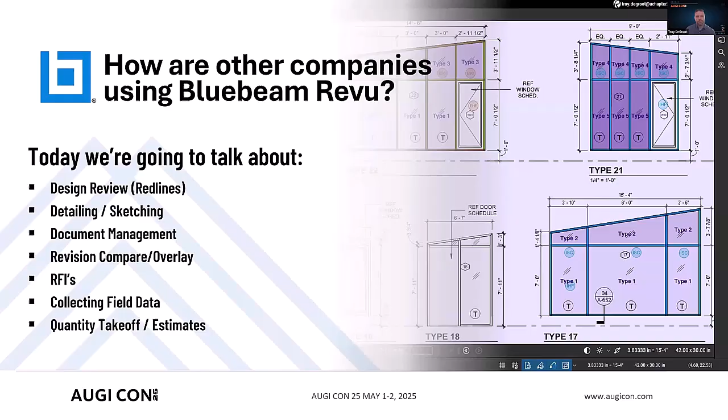So today, we're going to talk about how other companies are using Bluebeam Revu, your competitors. We'll go over just some basic red lines. We'll talk about detailing, sketching, some document management, revision, compare and overlay, RFIs, collecting field data, quantity takeoffs. And while we're talking about all of those, the functionality we're going to share, we've got a bullet list of a bunch of features that I'm going to show you guys as we go through.

So I'm going to jump into the software. I printed my last PowerPoint slide and turned it into a very, very basic digital dashboard. So what I'm going to be doing here is making sure that I check everything off the list. I've got hyperlinks set up to drawings that I want to show you these different things.

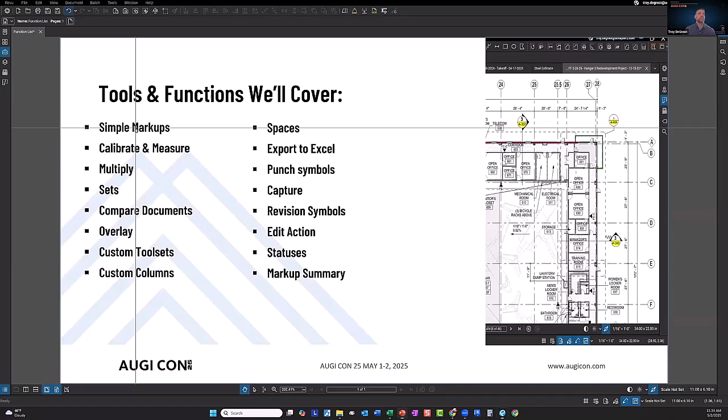So simple markups, calibrate and measure. We're going to jump out and do some of those. So got a drawing open here, just a structural drawing. Just real simple basics. We'll start there in the tools, tool markups. We'll start with the call out.

So call out, you guys know how to use these. It's just you're going to point to something and then you're going to place your note wherever you want it to be and type in what you want that to say. I get pretty creative with mine.

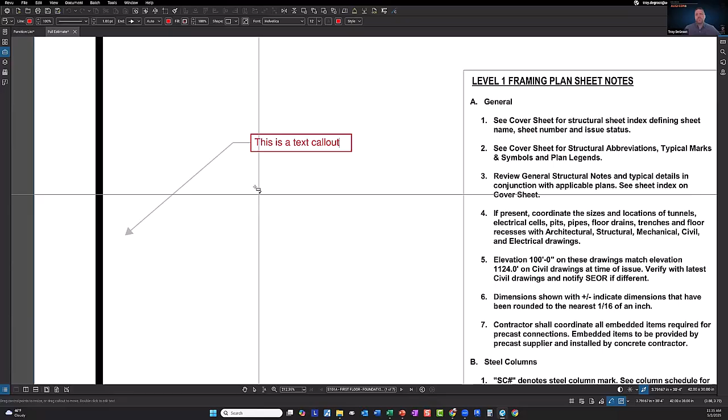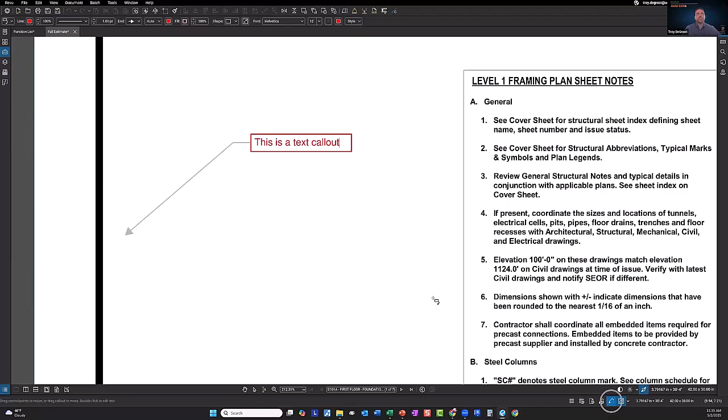And I always have my reuse markup tool turned on, just like all the CAD software we used. It keeps you in the command until you hit escape and cancel it. That button's down here on your status bar, reuse markup tool. So when I click off of it, it starts the next one, just like AutoCAD and those programs. So I'm gonna hit escape and cancel that.

What I want to show you with the call out is a lot of people will do text boxes and then draw the arrow separately, and they can't move those notes because they'd have to move everything again and again. So I like to use the call out.

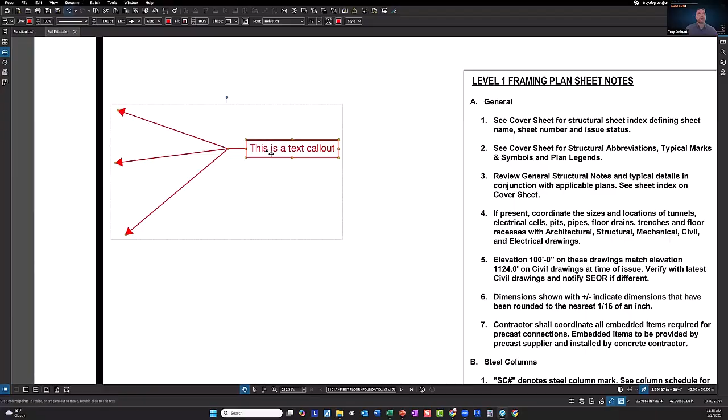If you want this note to point at several different areas of the document, you just right click, add a leader, and you can add as many as you want. Just right click, add a leader, and they're all connected. Like I said, a lot of people draw arrows in here. They get as close as they can to the elbow and they pray nothing moves. This way, they're all connected and they move together.

Another way to do that is just hold your shift key down on your keyboard and you can click on this little elbow here and it'll add a leader that way also. And then how you get rid of them is hold your shift key down again and click on the tip of the arrows you want to get rid of.

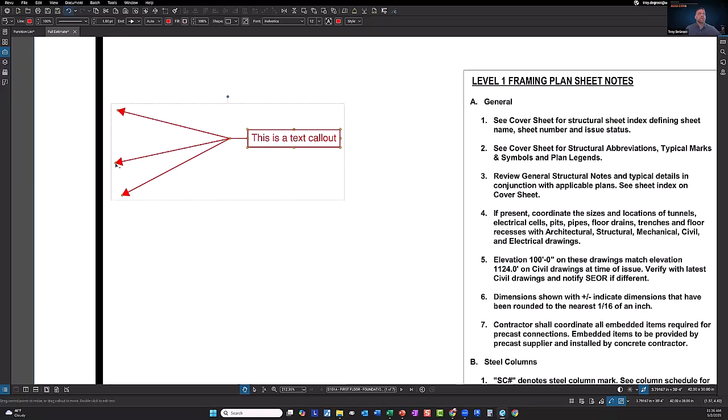So a little tip on that one. Cruising down, I'm going to show you the highlighter. The highlighter is actually a lot more than you would think. When you're in the open space like this, it looks like the tip of a highlighter, and you can come in here and draw your big yellow worms.

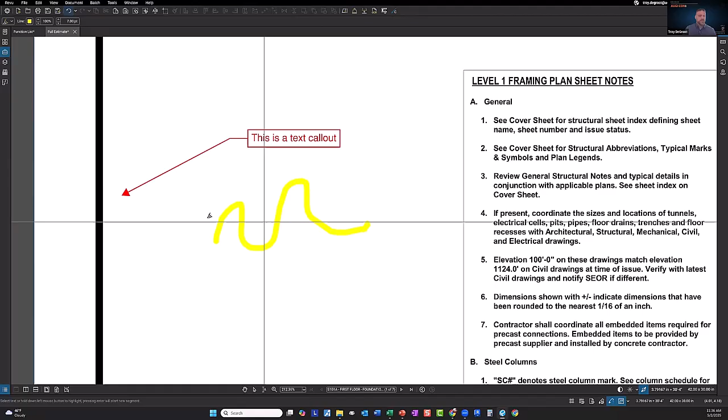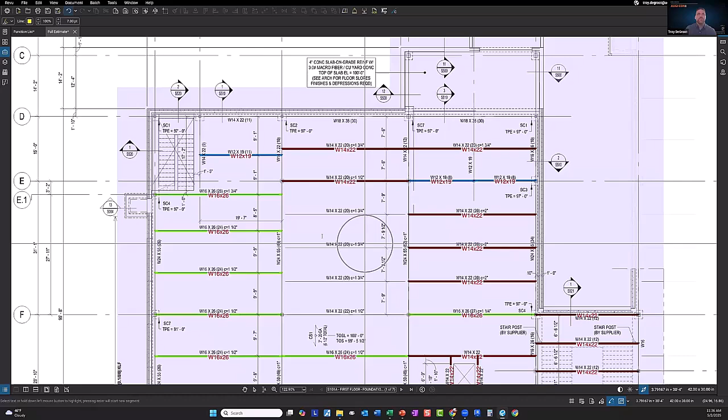If you hold your shift key on this one, you can draw straight horizontal and vertical lines, which can help you highlight over things. What you're going to find when you use your highlighter is that when you try to highlight something, when you get close to text, it'll grab the text. And you'll notice as you drag it over, it highlights absolutely everything except the one you were actually trying to highlight. So it's going to happen.

Just go ahead and undo that, pretend it didn't happen. The way you're going to do that is to go back to that highlight tool. When it tries to select that text, you're actually going to hold your control key down and it'll turn it into a freehand highlighter again. So I hold my control key and my shift key down so I can highlight over that text with a nice straight line.

Okay, I'm going to try this again with selecting the text because I want to show you there's two different results that we get doing it that way. So this one we drew the highlight over top of the text. This one we selected the text.

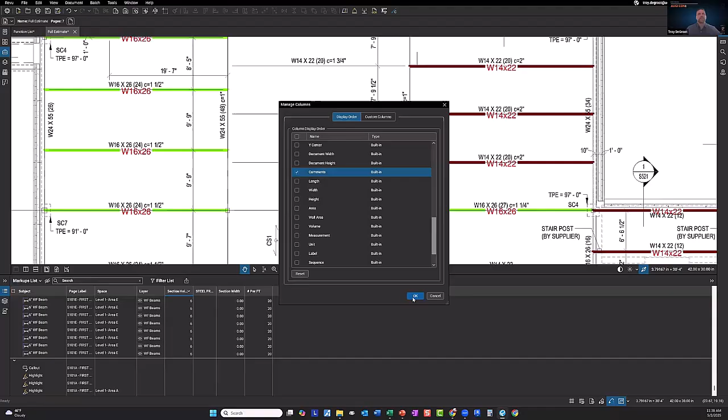If I look at my markups list down below where it's recording everything that I do with my markups and measurements, if I click on this one here in the list, and I need to turn on my comments here. Thought I had it on. There it is. Okay, so I've got my comments on.

When I select that one, you'll see that there's nothing in the comments. But if I select the one where I actually selected the text, it copies that text into the markups list down here. And why would that be important? Because the markups list is searchable.

I can come up here and type in whatever I'm looking for. Let's say W14 by 22. There's going to be a whole bunch of them. Let's not search for that. Let's search for the C equals. And as I started typing, it narrowed down the search to only the one that contained that.

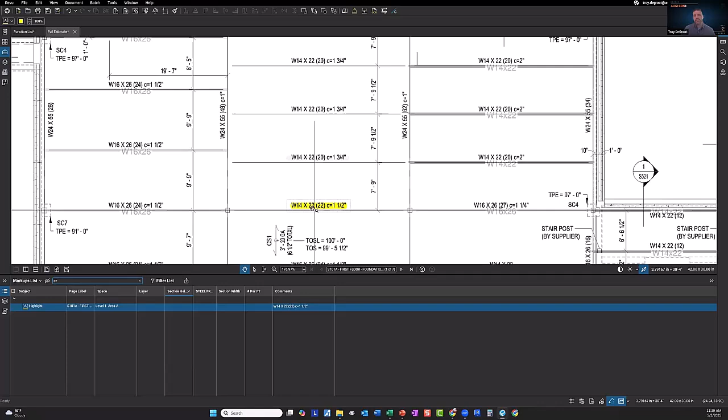So in a use case, maybe you're in a code book or a spec book or something like that, and you're highlighting all the important headers or the paragraphs that you need to read and things like that. If you're highlighting those, essentially you're creating flags or tags that you can then search for in that soils report or whatever you're looking for. It'll pop up. You can click on that markup and it'll bring you directly to that spot in the document. So great functionality there. It's not just a highlighter, it actually does quite a bit. So wanted to show that one.

Markups, some other ones. One of the ones that I get a good reaction on is the arc tool. So when everybody comes in and draws an arc, they pick a start point and they drag it out and they get this very strange half or quarter oval, which is fantastic if you're drawing cars from the 40s, but otherwise probably never going to use it.

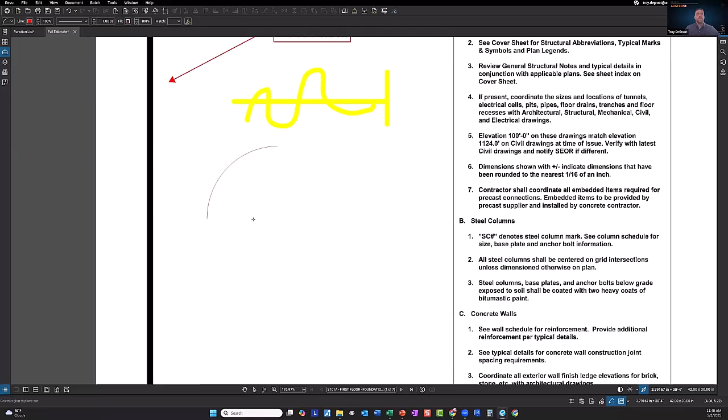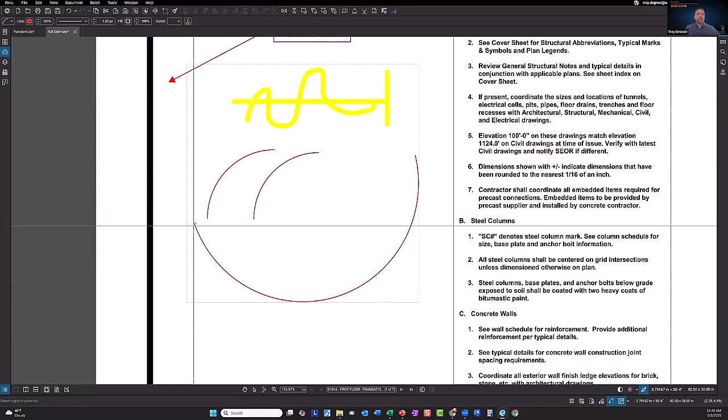The secret with this one is to go back in here, select the arc, and if you hold your shift key and start, you'll get a quarter circle. So that's a little bit better. Hold your shift key, you get a quarter circle. But the one we're all looking for, if you hold your alt key down, you can pick a start point, a midpoint, and draw that 3-point arc that we all expected. Hold down your Alt key, pick a start point, midpoint, end point. So I like to show that one.

Let's see a couple more.

The polyline is another one, and there's lots of tips and tricks with this one. The polyline is just a continuous line with different points, so you're going to pick, pick, pick. If at any point you don't like the path you're headed down, you just hit backspace on your keyboard. You don't have to delete it and start over, just back up and then continue again.

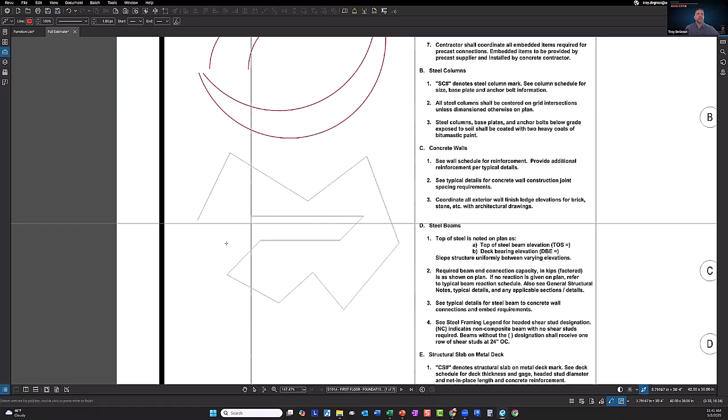If you hold your shift key during this one, it will draw on the 45s. Double click when you're done. Now, after you've drawn this and you select it, you get grips on all the corners and you can move those. A lot of us know that from AutoCAD and things like that.

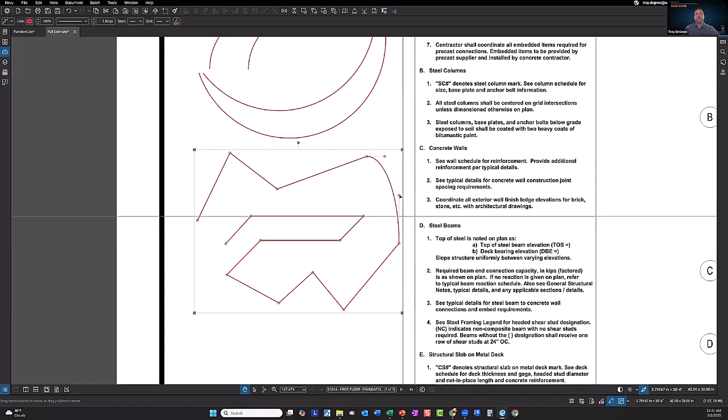If you hold the shift key down, you can add a grip anywhere on a line segment, so you can adjust that, or hold your shift key down and click on the grip to remove it. And then the last one, if you right click on any line segment, you can convert it to an arc, and it'll give you some additional grips to adjust what that arc looks like. So lots of things you can do with that one as well.

Polygon is the same thing, it's just a closed shape. All the same tips and tricks apply with that one.

Probably my favorite markup tool is the Cloud Plus, because I can click and draw a rectangle, cloud, or pick and draw whatever shape I want. Double click when I'm done, and then it gives me a chance to put my note off to the side somewhere.

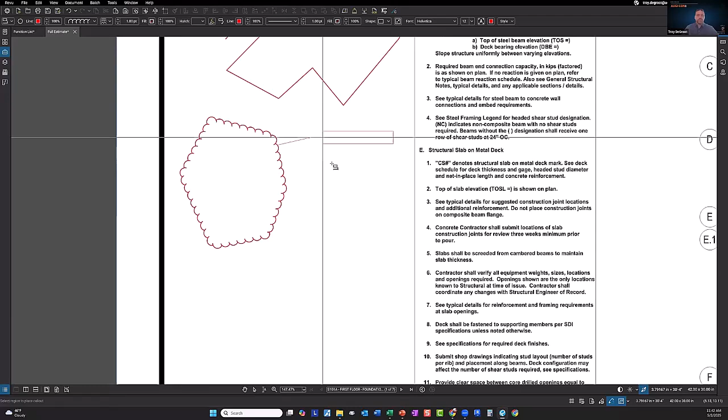I prefer the Cloud Plus over the Cloud. The plus means it's better, and that just gives me a note so I can tell you why I have a cloud. It always stays attached no matter where you move that. So that's one of my favorites there.

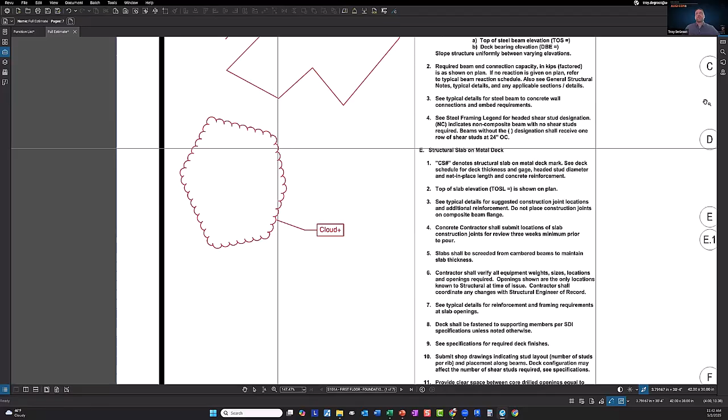All these markups are highly customizable. If you go over to your properties, you can start to look at, do I want this to be blue? Maybe I want a blue color inside of it. I can adjust all of that and get it to look exactly how I want.

A lot of times when we're working in Bluebeam, we're creating a visual language with different colors for different people and things like that. So lots of different customization you can do. That's just some basics that I wanted to show you for markups.

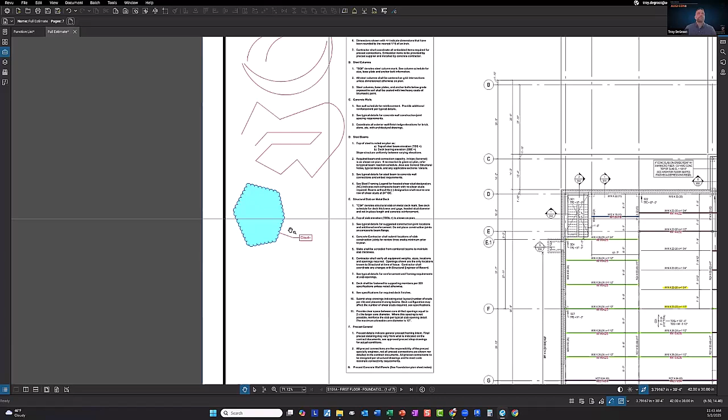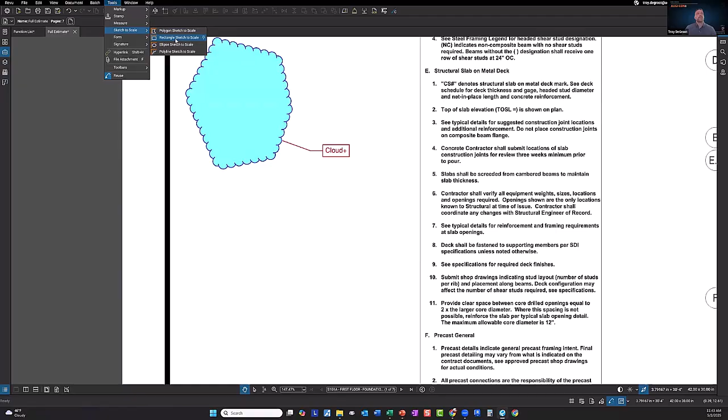When it gets into sketching and detailing, you can use the sketch tools, the markups we just talked about, or there's also the sketch to scale tools where you can draw things to scale. So you pick on your rectangle, and as you drag this out, you can tell it how far you want it to go. Hit your tab to go to the next one, and then hit enter when you're done. So you can actually draw things to scale in Bluebeam as well.

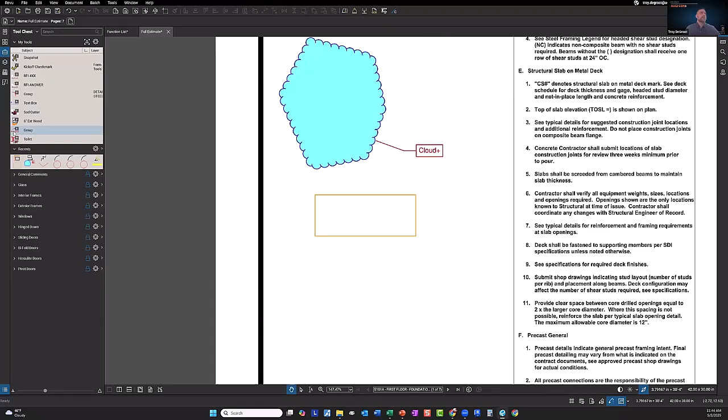Once you get things drawn out, you can also create groups and things like that. So if it's something you're drawing all the time, maybe I've got a Z strip for my facade or something like that, I can draw these components, create a group, and just save it in my tool chest. This is a detail I do all the time, so I just add it to my tool chest so it's ready and already done.

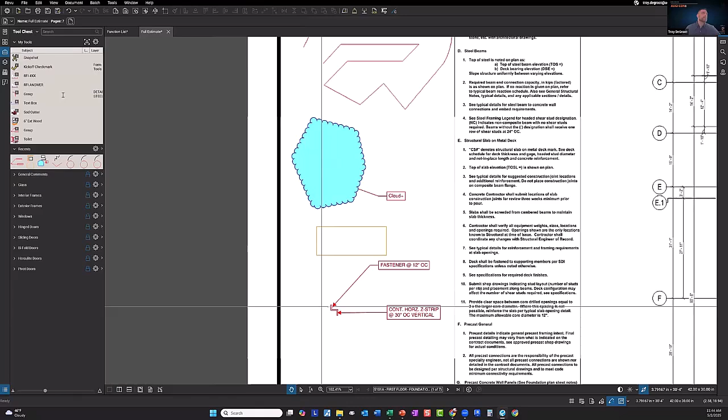Another one I have up here is a steel connection. So I can bring that into a group, I can ungroup it and start modifying all of these different components of it. So it can be a sketching tool as well.

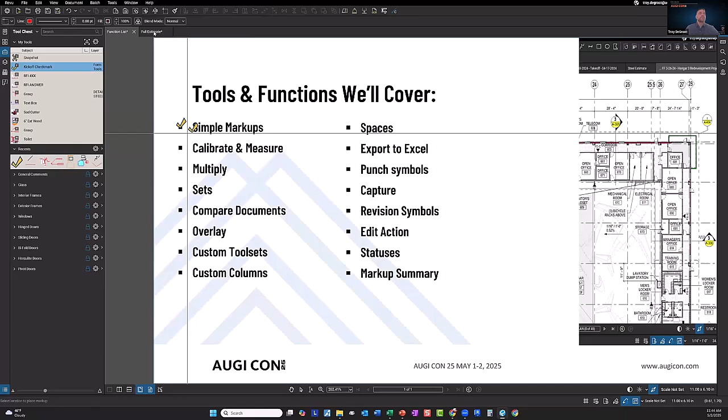The next one I wanted to look at, let's see what we got over here. Let's go ahead and check that off. Let's calibrate and measure. So I'm going to come back over here. I'm going to calibrate. Typically, you pick the biggest dimension you can find. I'm just going to use one of these.

Jump over to my measurement panel over here. There's a preset button where you can select any scale to match your title block or the view scale, whatever it says. So you just select 1/8 inch equals a foot, and all the dimensions you do after that would respect that scale.

I teach all of my students every single time to never do that, because there's a little button called Scale to Fit that will fit your drawing on whatever size piece of paper you accidentally chose last time. So this 42 by 30 could end up on an 8.5 by 11, and the title block still says 1/8 inch equals a foot. So I do it manually.

It's just as easy. I click on the calibrate button, come up here. It's going to tell us to select 2 points of a known dimension. I pick a dimension I know.

Now, anytime I'm doing measurements or calibrating, again, I want to go down to the status bar and turn on my snap to content, and it will actually snap to the content of the PDF. I don't have to zoom in and try to find the middle of these pixels. I just snap directly to that line. I like to hold my shift key so I don't calibrate on a skewed line. Jump all the way over in a straight line over to here, snap and pick.

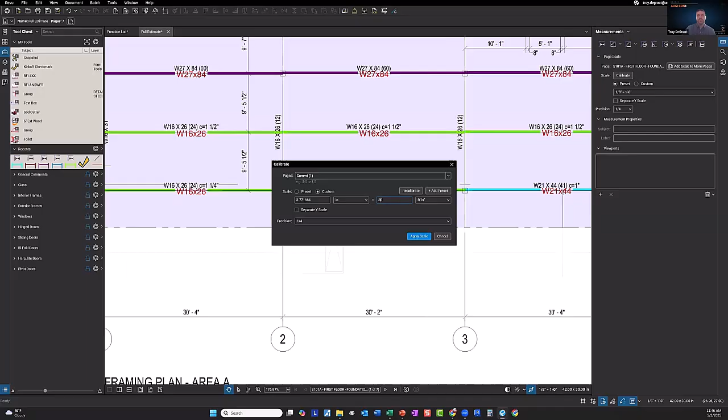And then it's telling us that this random distance on the piece of paper equals a foot. I'm going to update that to 30 foot 2 and hit apply. And now all the measurements I do after that will again respect that scale. So we got our 30 foot 2. Now I can go in here and get whatever measurements I need to this opening, the size of the opening. I can get accurate measurements of all of that stuff.

So that's the calibrate and measure. All your tools up here. Poly length is just a poly line that gives you the length of each segment and the total. You got areas, volumes, counts, all of that stuff in here as well.

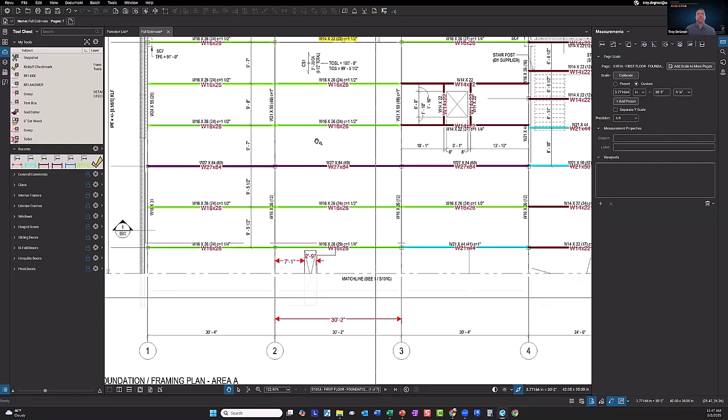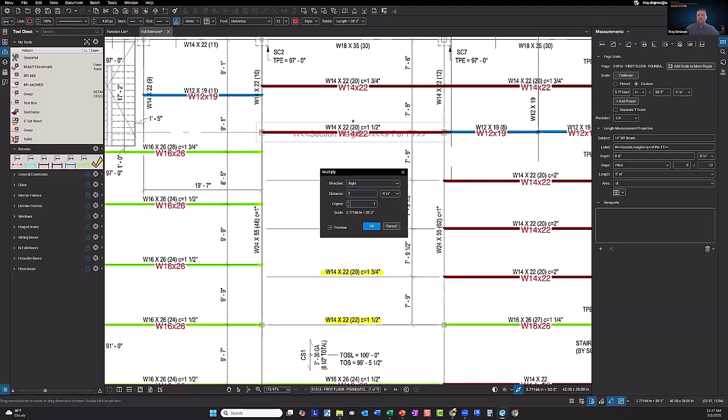Another feature that came out relatively recently is multiply. So these spacings are pretty close as far as markups go. So I'm going to grab this one here and right click and go to multiply. And I'm just going to type in 7 foot 9. And I'm going to go down with my multiply and just tell it how many. So I'm going to count these up until it gets down to there and hit OK.

So I can very quickly, I don't have to pick all of these and draw those in. If it's a good spacing, you can just multiply those. Now, in an instance like this where we're just tracing over things, 1/2 inch may not matter for markups. We're not modeling in this case. So next one, go back to my list here. Check them things off here, and sets is the next one.

So sets is a document management best practice where we extract all of our documents from maybe a single PDF that's 36 pages. We turn them all into individual pages, and then we load them into what Bluebeam calls a set. I prefer to call this a binder. It's more like a 3-ring binder where you snap it open, you put all your drawings in there, and what happens is when you have a revision, you can slip sheet under batch slip sheet.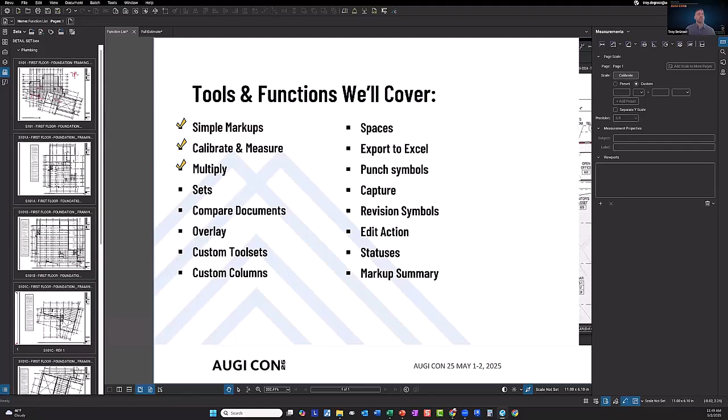You can slide in the documents that changed, that were revised, and basically, you're snapping open that 3-ring binder, you're putting the new one on top of the old one and snapping it back closed. And so your entire team can open up this sets BEX file here. And when they click on a drawing, they only open one at a time. So if I look at this one and I go look at this other sheet, it will close that one and open this one.

So that means because they're individual sheets, my whole team can be in this set, jumping to different drawings within the set, rather than typically you have a 36-page document and the first person that comes in the office owns it. Everybody else gets read only. They save their own version to their desktop, they mark it up, and a revision comes out, and we got a big mess. So sets allows us to all be in that same most recent. One person can be in charge of slip sheeting those revisions, and everybody else just has access to the latest drawings.

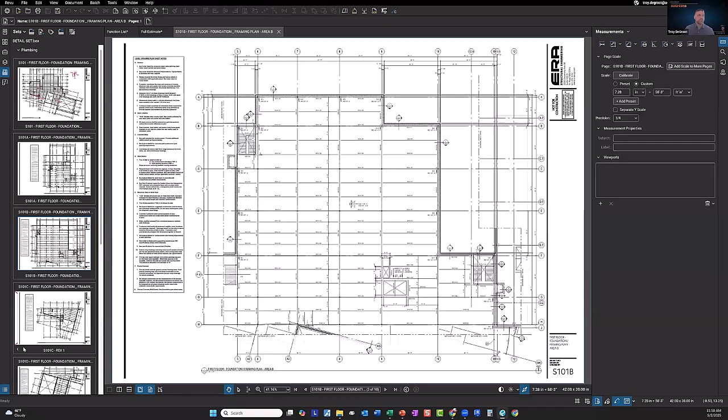So you can see down here, I did a slip sheet, and so the current one is on top. The old one is behind it, so I can go look at that as well. They're always just stacking up. Go look at the new one. And then once you have these in here, I can right click and go to compare documents and say, okay. And it's going to look at the drawings pixel by pixel and cloud everywhere where there's changes.

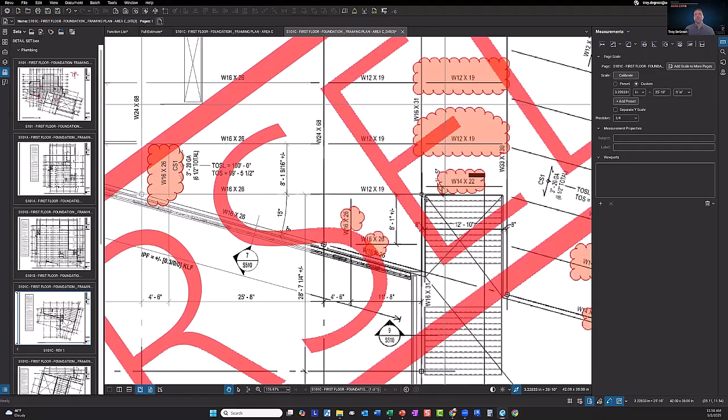So you can see here something was happening in here, maybe a beam size updated, different things. You can see clouds over here. So you know that that's where some changes are, because clouding is sometimes a thing of the past these days. The other one you can do, so this one tells us where the changes are. The next one is going to be an overlay.

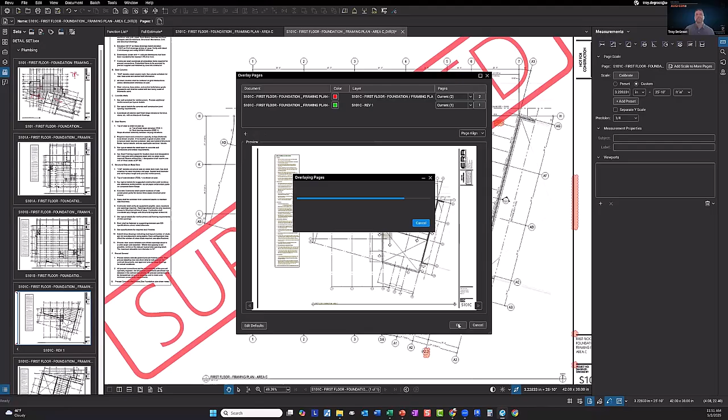Again, it puts those on top of each other like the old light tables. I'm going to say OK. And here you can actually see what changed. So if we look at the layers panel, you can see I can turn off the original and look at the revision. Rev 1, they're each on their own layer.

Turn on the original. And so now I can look at this and know that the new one is green, the old one is red. I've got all these different beam sizes in here that changed, which beams were the dominant one, and so on. So it does a nice job of showing you what the changes are in this case.

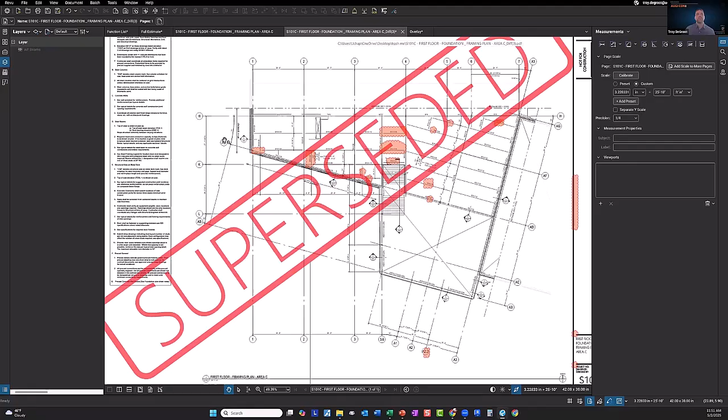Now, a trick that I want to show you guys, if we go back to our compare with all of our clouds, if I select all of these, just draw a window around it, and I copy. If I go back to my overlay and I do a Control Shift V, it will paste all of those clouds on my overlay.

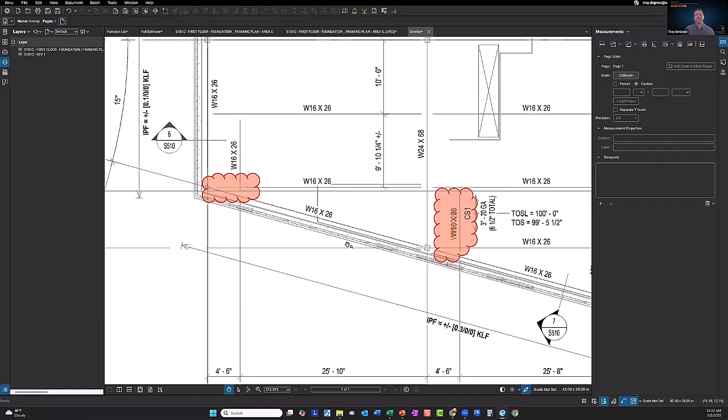So now I know where the changes are and I can see what the changes are with the overlay, both of those features on top of one another in one drawing. So just a little trick with that one, being able to combine the compare and the overlay. Start closing some of these. Let's go back here to our list. Sets, we did, compare, overlay.

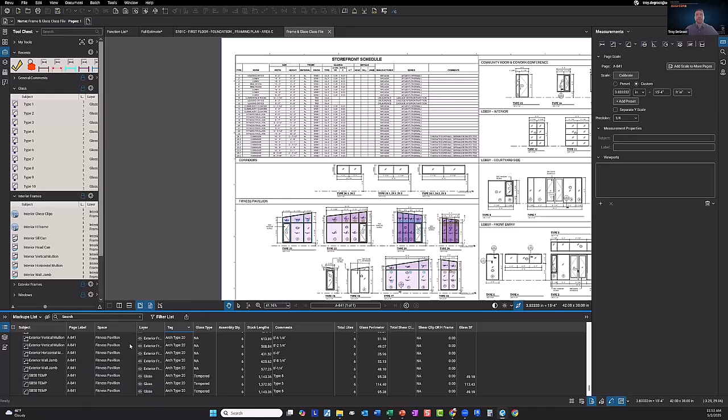Next, we're going to talk about custom tools and custom columns. So custom tools in your tool chest. The tool chest itself is one of the most powerful things in Bluebeam. We can build custom tools to do just about anything. That in conjunction with the markups list is where you're really going to maximize your Bluebeam environment.

So making tools that are very visual and marking things up, and then having the data down here in the markups list that you're collecting. And then you can export this, you can create summaries and all that type of stuff we'll talk about also. But in this case, what I did for a customer, they were a glazing company, so they do glass. I built custom estimating tools so they can come in and let's just do this one here.

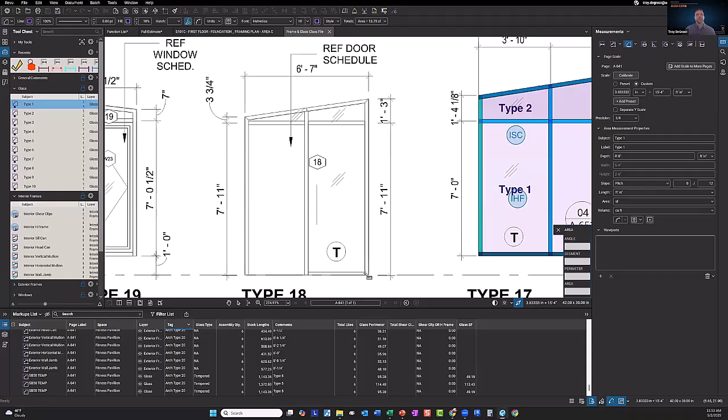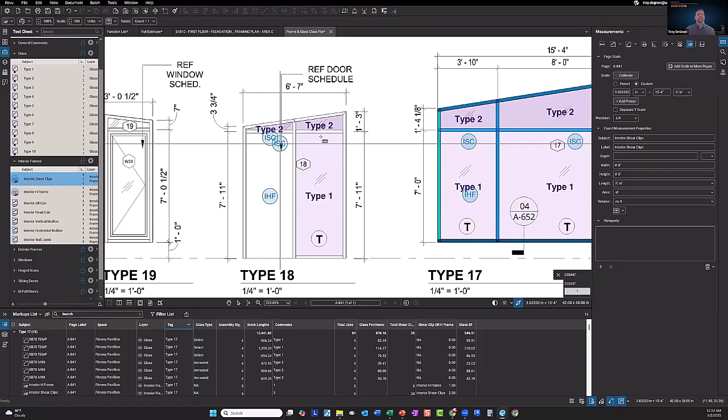Grab their glass, type 1, just snap in here and draw in those different pieces of glass. Very quickly, they're getting the square footage of glass. It's labeling it. And then we can come down to our frames. So I've got an H frame here. I've got shear clips on each side of those horizontal mullions. I've got a sill can down here.

And I'm just marking up all the different components of this window frame. Got my head can. And really, it just looks like I'm highlighting things. But actually down below, you're seeing it pull in all the lengths of everything. It's recording the type of glass. They can start answering some questions in here and having it calculate some different things.

So what this particular customer did was we created all of these so they could mark them up. And then they export all of the data down here into a CSV. So if I go to my summary, CSV, I'm just going to let it do everything. But we built custom configurations because they had 6 different tabs on their Excel file where they were actually doing their estimate with all the formulas and everything.

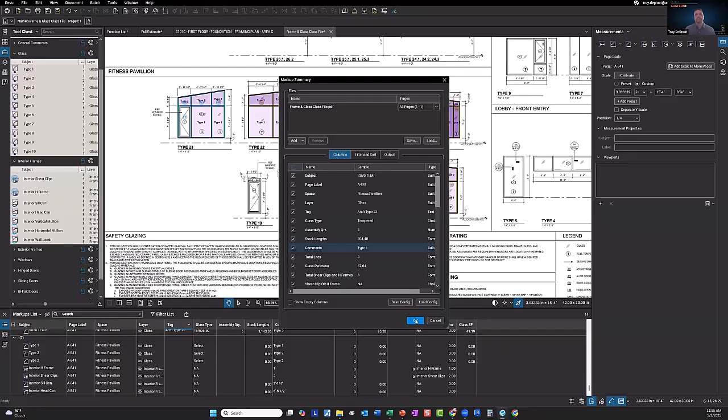So we built this to collect the information, and then we extracted and did a copy paste. So here's all that information that I extracted from there. And then I would just go in and grab all of it, copy and paste it into their workbook. And it would come in right here. And all the right columns would load in the right places. And then all of their calculations would happen off to the sides over here and down below.

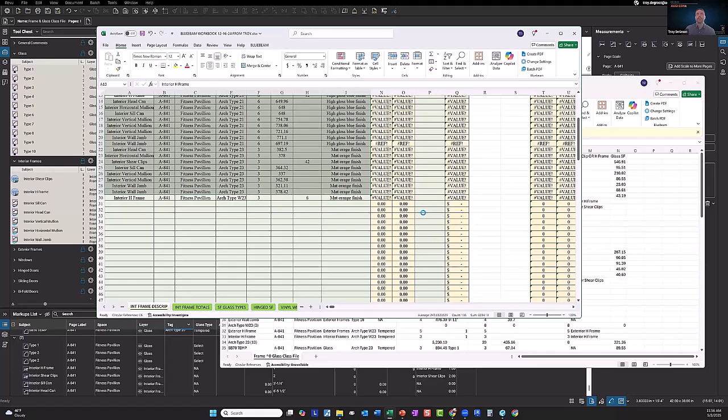So with any estimating, we can start with the end in mind, whether it's an estimating software or an existing spreadsheet or something like that. But we use those to design the markups list, and then we use that to design what the tools look like. So we can collect information and have it flow from Bluebeam through those different sources or different softwares that we want to get to. So wanted to show that example. We'll show a different export later.

Another thing that I wanted to show here was spaces. Spaces are used to locate our markups. So in Revit, in the Bluebeam plugin, there's a button where you can actually have all your rooms in Revit convert to spaces in Bluebeam, so that when you place markups inside those rooms, they know where they live. So in this case, I'm going to do the same thing, but in an elevation view.

So you'll notice that all of these window frames are in the fitness pavilion here. And down here in spaces, it tells me the fitness pavilion. Well, I'm going to take that a little further and really use these as assemblies, and I'm tricking spaces to tell me those assemblies. So I'll create a new space and I'm just going to trace around this one and call it type 17

and hit OK. And now when I look at my markups list at my spaces, if I sort it by space, it will tell me fitness pavilion type 17, and it shows me all the parts that I need for that assembly. So I'll bring this up a little bit. So there's 15 parts, glass, mullions, jambs, clips, all of that we need for that specific assembly.

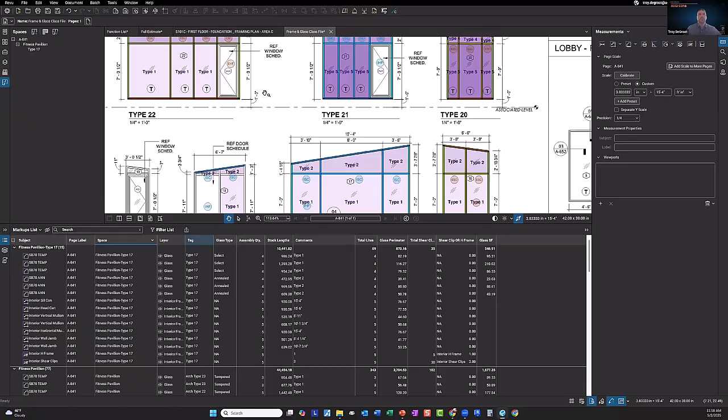So I would draw another space around each one of these, give it the name, and it would itemize those lists for me. And then in here too, the assembly quantity, I built it so that they could say how many there are, and then it would multiply all the quantities times that number. So lots and lots of cool stuff that you can do down here for different workflows. Estimating's a good example of that, how you get those to work together.

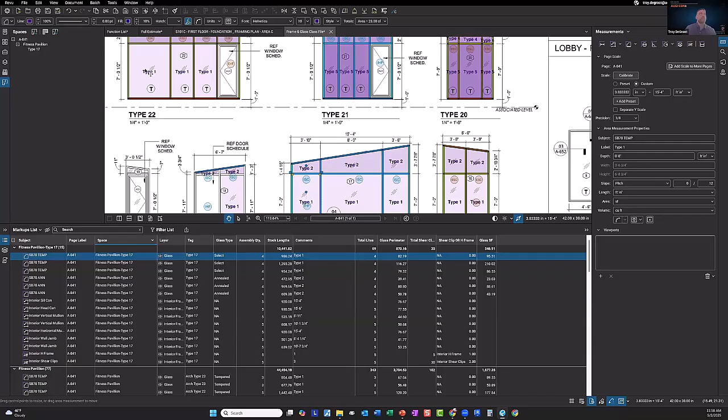Jumping in here, got to make sure I do all these. Grab my check mark. Okay, so talked about spaces. We did an export to Excel. We're gonna do that. We didn't do that yet. Let me go back. I'm gonna open up this drawing here.

So on your drawings or on your documents, if you have a table or a schedule like this, you can export that. So if you go to File, Export, and come down here to Excel Workbook, I can do a full document or just a page region. So I'm going to do a page region, draw a box around this table, tell it where to save, and it'll open up Excel for me.

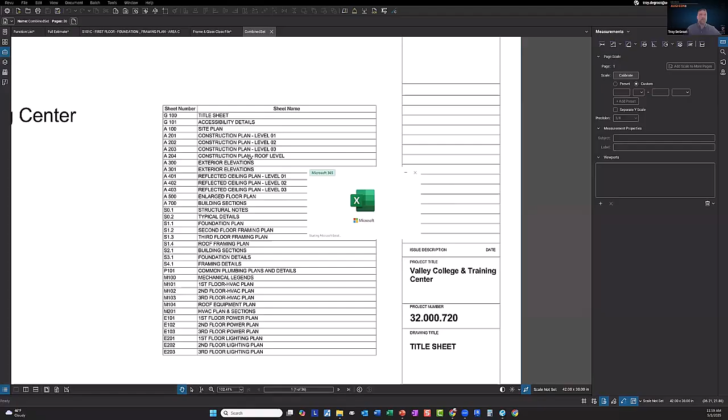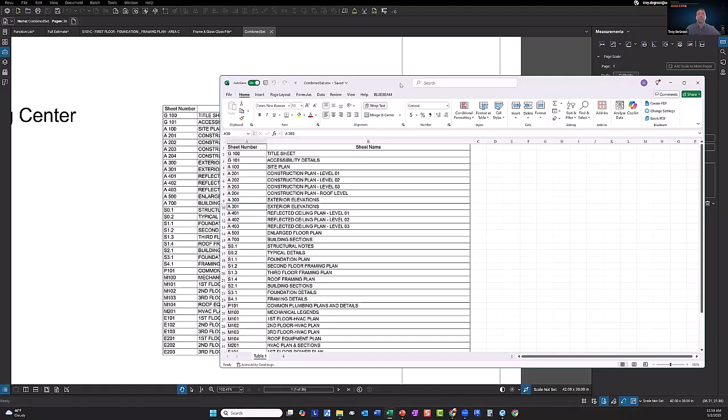And you'll see it's all formatted just like it came from, with different cells, rows, columns, and all that. So you can make any edits that you need and use it for those different purposes that way. Same thing for Word. If you go into File, Export, you can export an entire document or page region as a Word document as well, or convert it to a Word document, I should say.

So all those PDFs that you typically have to retype the entire thing, we don't have to do that. You just come in, export it from your PDF to a Word document. You can work with it there. And it comes in formatted exactly how you took it from, which is pretty cool. Okay. What do we got? Punch symbols.

So I'm going to open up a punch example here. And in this case, I played the role of a general contractor and I created tools for all the different trades so that I could communicate things that they needed to fix on the job site. So, dark red is actually structural, yellow is electrical, blue is plumbing, orange is mechanical. So I placed those markups in here, little punch symbols, clouds with notes, and things like that.

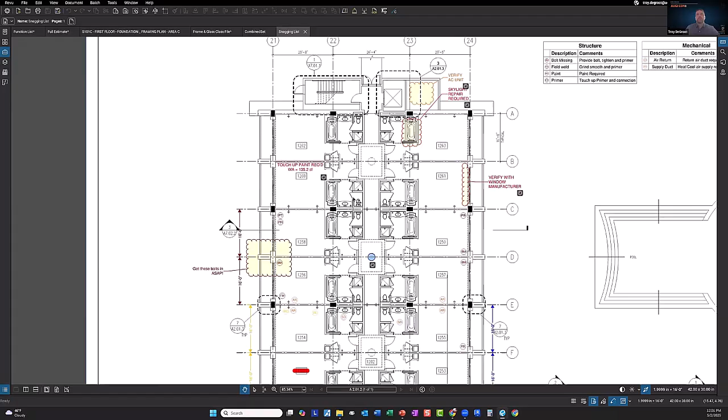One thing you can do in Bluebeam is add images to your markups. So here, rather than pasting a big image on the drawing and fitting like 6 of them on the entire sheet, you can right click, go to capture from file, and add whatever images that you've taken and saved. Or you can go from camera if you've got a Surface Pro or something out in the field. So once you do that, you get this little lens here indicating there's an image attached. When you click on that, it'll open up this flip book showing you that image.

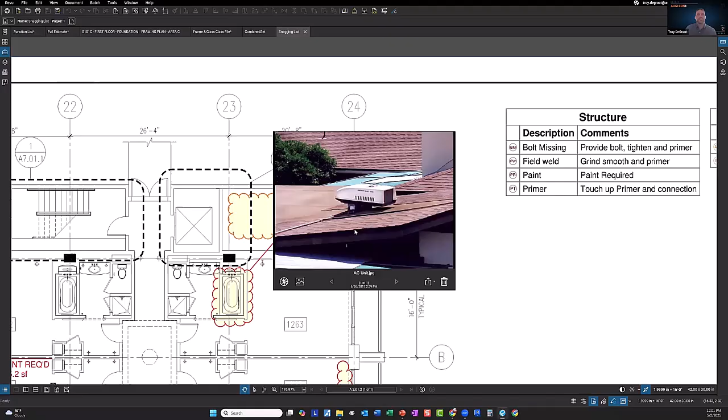So here, obviously, we have a mechanical issue. Somebody used an RV air conditioner on this hotel. Another one here, we've got a skylight repair required. Some good flashing work done there. But just having fun, I put in some good ones here.

You can also attach 360-degree images. So this is one that was taken. I can navigate through here. These are always nice because you capture more information than you thought you needed. And sometimes you need that stuff. So 360-degree cameras, you can add that, attach that to your markups as well.

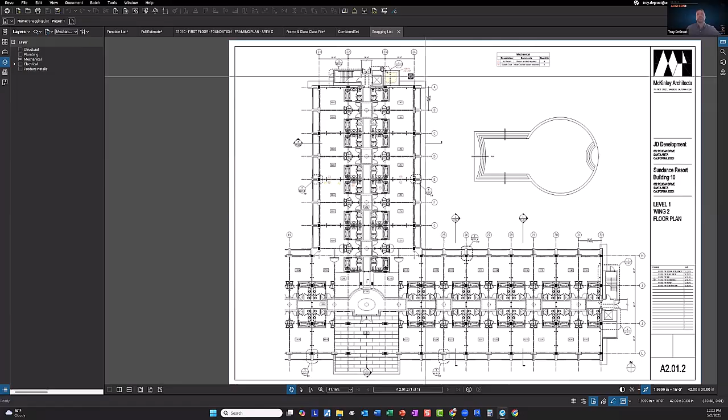So what I wanted to show with this one also is that we can put these on layers. If I go to my layers, I can have layer states. So if I want to look at just the electrical, I can switch that out and it will show me just the electrical. If I want to look at mechanical, it'll turn off everything but the mechanical. So a lot of functionality there, very, very similar to AutoCAD.

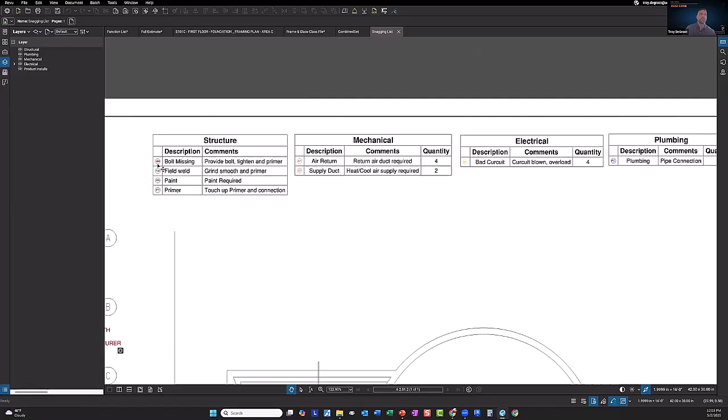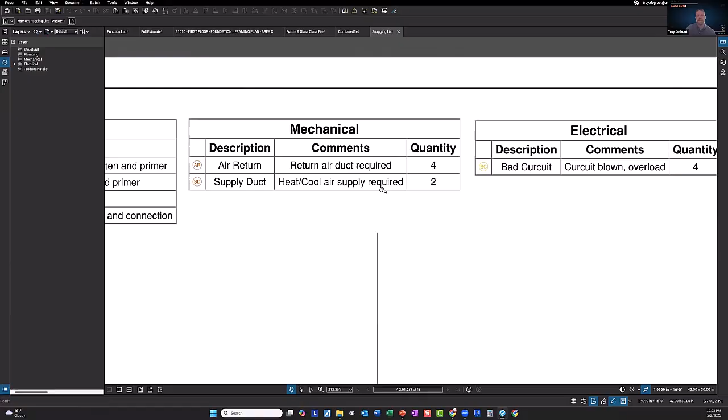And what I did here, along with layers, I also did legends for each of the disciplines. So it's recording live only the punch symbols that I've done. And I built those symbols to have basically a description, bolt is missing, and then the comments is where I provide a fix or how I want that fixed. On this one, I added a quantity so I knew exactly how many of these different products I need to bring, maybe what kind of equipment I need or tools, how many people, things like that. So I made a descriptive legend in here for each one of those.

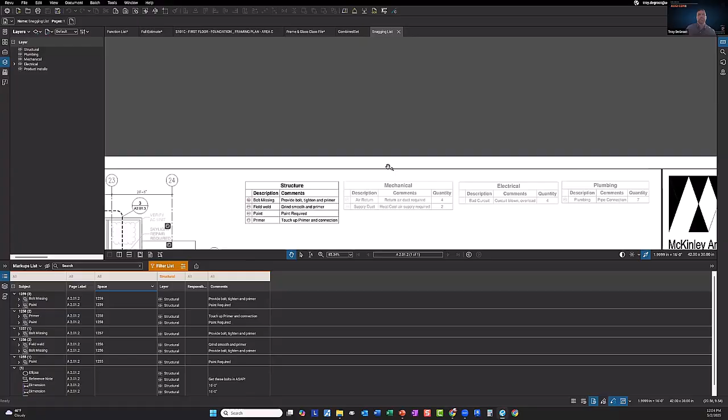And now I can work with those layers and also the markups list. If I come in here, I can filter my list to only show structural. We'll do that one. And it'll gray out all the other markups. I would then probably just come over here and change this to only show the structural. But now I can run a report of just the structural punch list and hand that to my structural contractor, right? So here, sort and filter.

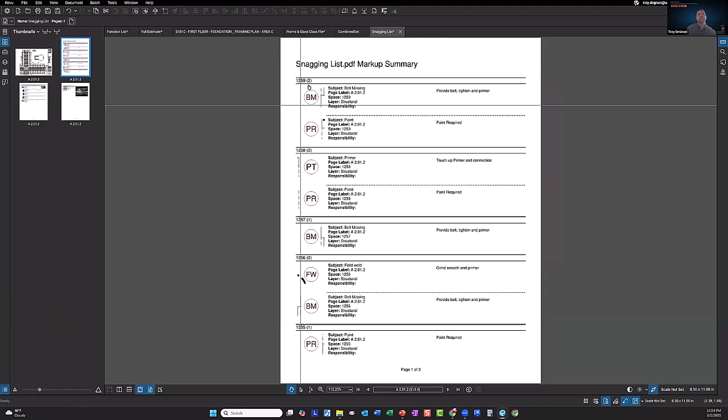I want to do only the structural, and I'm going to say on my output, I want to append and hyperlink to the current PDF. This is a good one because it'll add it to this drawing file at the end. And there's some nice functionality when it does that. So here's my report. If I look at my thumbnails, you can see it was added to the drawing itself as other pages. It gives me all the information from the markups list. And this little symbol here is actually a hyperlink. So when I click on it, it will bring me to that spot in the drawing.

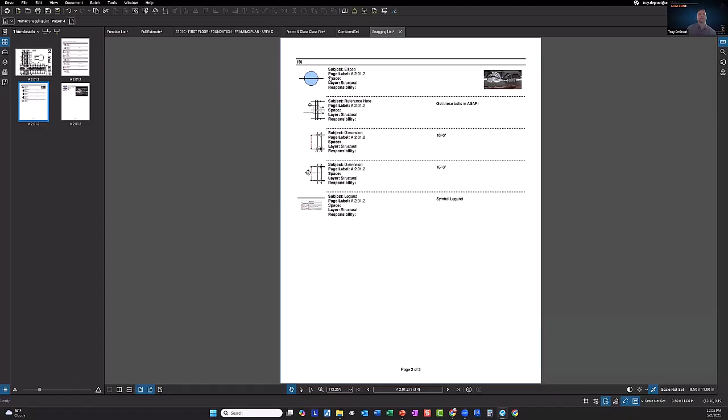So I can go through and look at my report, hand that off. And then at the end, there's a capture media summary where it brings your images with it. So in Bluebeam, when you have images, the PDF is like a container, and these images live in that container. So when you send the drawings, they go with it. You don't have to worry about sending them separately, and this one belongs to that, and so on and so forth. You just attach those to the markups.

When you send it to somebody that doesn't have Bluebeam, they won't see those little cameras and the attachments to the markups. So the workaround is to run this report, have the capture media summary attached, and then they'd be able to download these images from here. So that's one way to get non-Bluebeam users all of those images as well. And it's actually a really nice report here. So a good use case there for that.

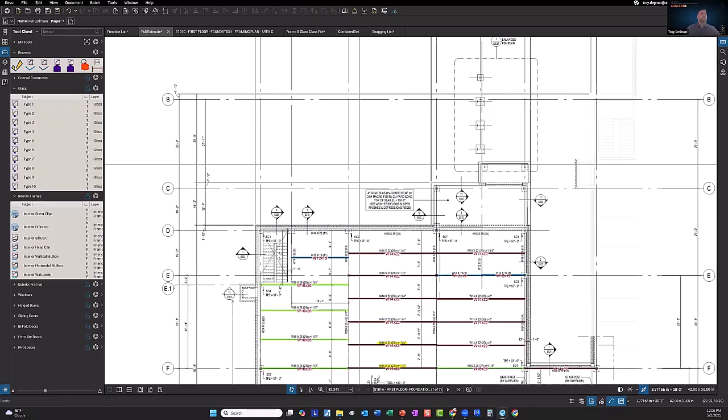Let's see. What do we got? Punch, capture. Let's talk about a revision symbol real quick and edit action. So I'm going to jump out here. For revisions, a lot of times I have a tool out here for an RFI, something like that. I have a symbol up here that I'll just place on my drawings. Right next to where it's at, I can double click and change that to whatever RFI it is.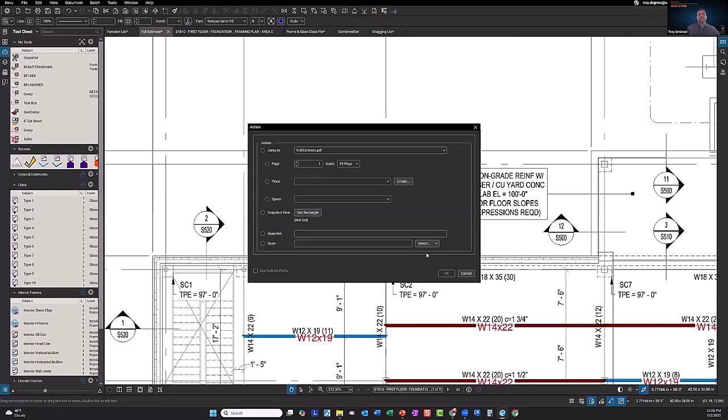And then I can right click, go to edit action, and go and select wherever that RFI is. So I'm not going to dig through all my stuff here to find one, but you get the idea. I'm going to attach a building code here and just pretend that's an RFI. So here you'll see the little lightning bolt. That means that there's a file attached to it. And when I click on that, it'll open up that file. So we're going to pretend this is an RFI. It opened up on my other screen.

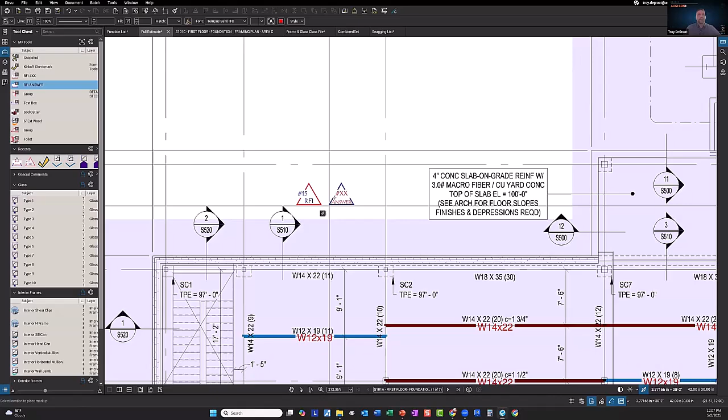And so I keep it all organized that way so that on my drawings, I have kind of a dashboard of where all my RFIs are. Or similar, like I was saying, revisions. You might have this hyperlink to a revised drawing or something like that. And then I also have one that is the RFI answer. So I might place this back after I get a response, mark that one 15 as well, and then hyperlink to the response that I have.

So I'm trying to keep everything in one place, kind of like your drawings turn into a dashboard. And when we're using sets that I talked about earlier, all these markups, when you slip sheet, they copy to the new version of that drawing. So you never lose anything on those back versions. So you would just keep collecting RFI after RFI on that one set of drawings.

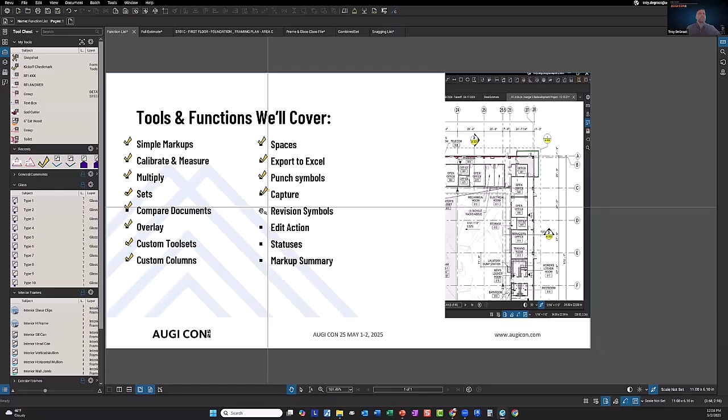Okay. So that's the RFI and the revision symbol. Talked about that a little bit, the RFIs, edit action. And then the other one, I talked about the summary already. Doing good on time. The statuses.

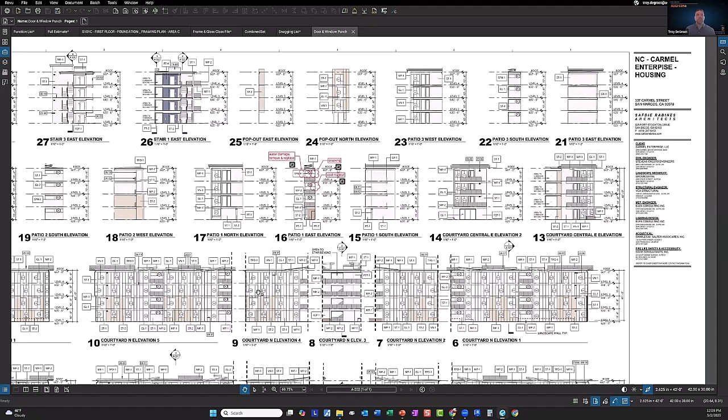So when I was in production doing structural design, modeling, AutoCAD, all the architects, all you guys, you can build custom statuses. So it was all done on paper when I was doing it, which resulted in some very late nights. The engineers would get done with their markups at 3 o'clock and assume that's when I start my day. So I would start applying all those. And then as I applied those to CAD, I would scribble over it with yellow highlighter. And then they would back check it and scribble over it with a green highlighter. Well, we can mimic that in Bluebeam so that we can stay digital.

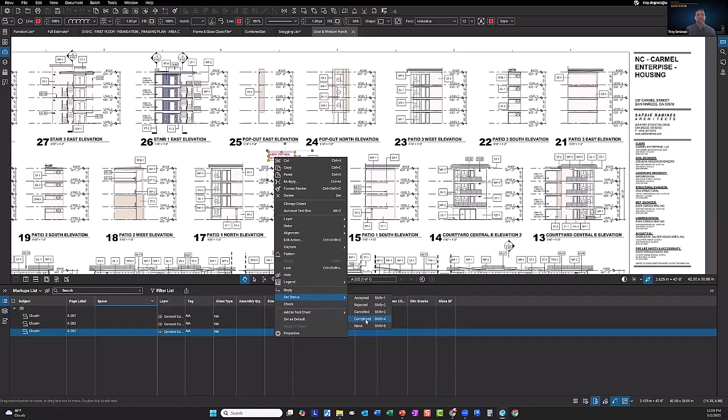Once you finish this markup, you can go into the status here, or right click on it, go to the status and mark that one completed. And it will change it yellow when you mark it completed. Let me turn on my statuses down here. There we go. Status. So now over here, it has a record of Troy DeGroot marked these complete today at 12:09. And we can't get rid of those.

It's always in there. And now when the engineer goes and back checks this, they come in, change the status to accepted, it turns green, mimicking that green highlighter. So everything's green before we print a new drawing. If I go to this one, mark that one completed, and I didn't actually complete it correctly, they can come in here and mark it rejected, and I can have it turn pink or whatever to draw attention to that. And again, all of those status changes are recorded down here. We can't get rid of those.

So in that process, if you start to see things constantly being rejected and redone, we've got a training opportunity, obviously. So it's nice to be able to record all those status changes and what's going on, not only so we get good drawings out, but so that we can really track our employees and how they're doing with their red lines and how efficient they are with those and understanding each other's communication. Sometimes it's not the designer, it's the way it was marked up or some hang up in the communication.

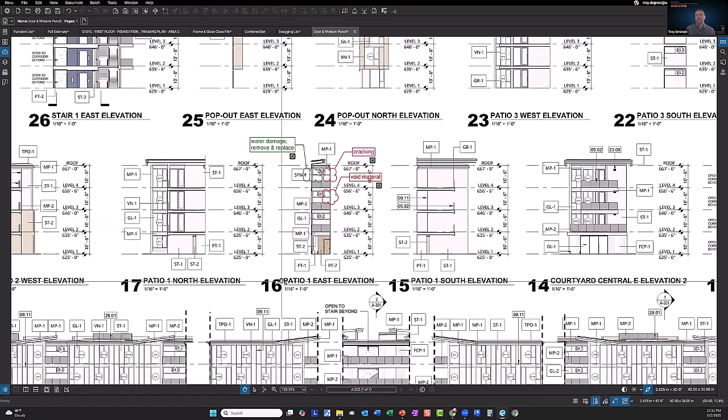So that is statuses. And we talked about the markup summary with the punch list. Same thing with all your markups for your red lines. If you were to run a summary of that, you'd get a list of all of those markups and the information in there and what the status is and things like that.

So I'm going to check out the chat and see if there's any questions. I think I saw some as I was talking. Lots of them in here. Oh, those are from the past ones. Let's see.

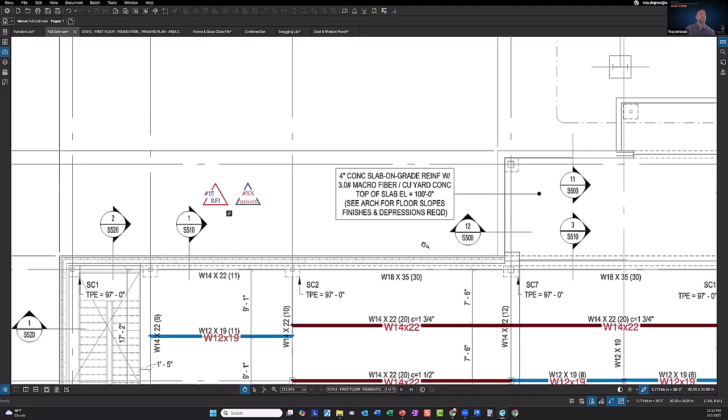The shift key trick, Aaron. Yeah. So in Bluebeam, there's 3 keyboard buttons that will change how almost every tool works. And so I talked about the one with the shift key, how it helps you draw straight lines. It helps with a lot of things actually, but the control key is another one. So if I want to make a copy of this note or the highlight or whatever the case might be, if I hold my control key down, I can just click and drag that copy wherever I want it. Hold your control key down, and they're all independent of each other. So I can come in here and modify whatever I need to in this one. Okay. So that's the shift and the control.

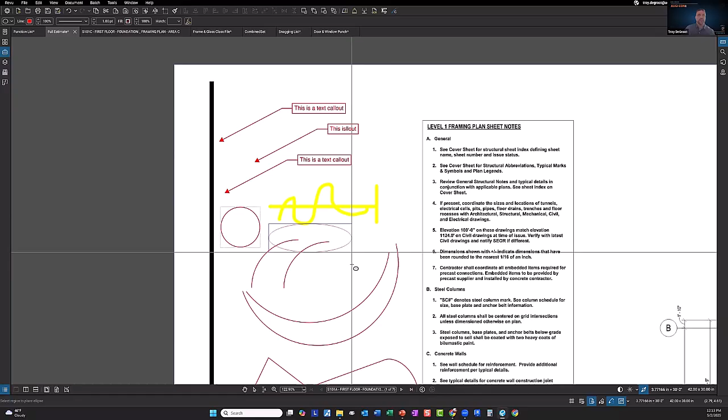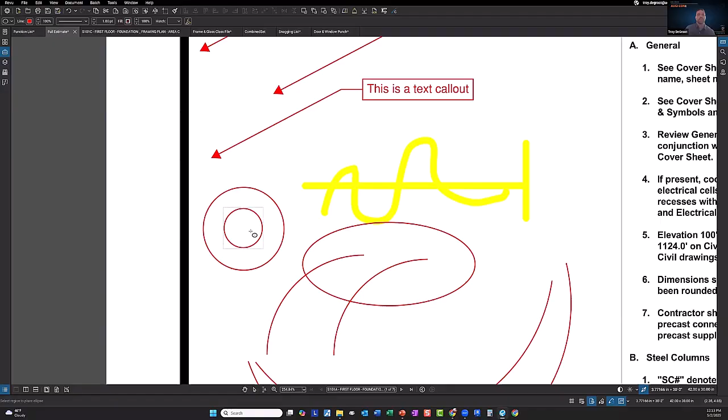And then I talked about the alt key also, where that helps you draw circles from the radius instead of corner to corner. Let me do one of those. So a lot of people know if you hold your shift key, it'll draw a circle instead of the oval that it gives us by default. But if you hold your alt key down, you can draw a circle from the radius, which sometimes is a lot easier. So some tricks there. So Control, Shift, and Alt will change how a lot of your tools in Bluebeam work, make them more efficient, more accurate for you.

We'll need to look at sets instead of Bluebeam sessions for multiple users at a time. Yeah, definitely. Nancy, you can use sets in a collaboration with a bunch of people. It doesn't have to be in a session, but if multiple people want to be on the same sheet at the same time, then you would push it to a session and be able to have up to 500 people marking up the same sheet at the same time, which can be really nice when needed.

Can the layers come from AutoCAD when printing from AutoCAD? I've seen a lot of times the layers come through. I'm not positive what the settings are in CAD to make those push through to the PDFs. I see it a lot in civil drawings, but I'm not sure what that setting is in CAD.

Good question, Tony. The PDF plotter driver needs to be configured to include layer information. Yeah, thanks, Scott.

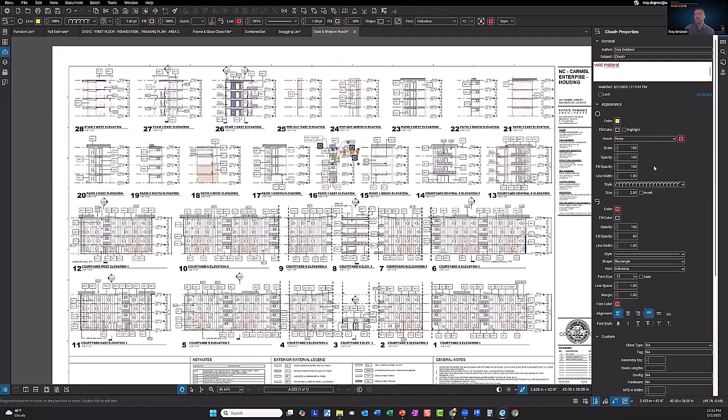We use yellow as well for completed status, but picked a slightly darker shade. Yeah, my team complained about the yellow, it kind of disappears on that drawing. I would agree. I typically pick a different yellow as well. If I go to my properties, I've got one saved that's a little more mustardy, if that's a word, and you can see that a little better than the yellow.

Awesome, that's it in the chat. Is there any in the Q&A? Let me see here. Yeah, you have a few in the Q&A as well, Troy.

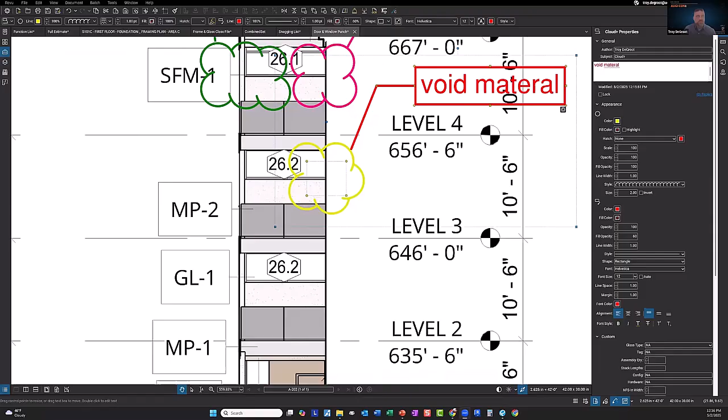Does it keep the previous sheet that you slip over? Yes, when you do your slip sheet, just like this one, it stacks those up so you can always page back to the previous one. They'll keep stacking up as you put those revisions in there, which is really nice to be able to see those on top of each other.

Can you do the overlay instead of the compare? Yeah, you can do either one. If you're asking, can I bring the overlay information onto the compare, we can't. The overlay is actually overlaying the two documents. There's no actual markups in that function, whereas with the compare, they're marking it up with actual clouds. So you can copy and paste those onto the overlay, assuming I'm reading between the lines with your question there.

Can you control how the graphics that equal completed look? Adam, I'm not sure what you mean by that. We can only change the color with the status change. We can't change a line style or anything like that.

How can you undo a status if you misclick and set it to another by accident? Whenever it happens to us, we can't, and when we change it, it adds on a new status. Yes, if you undo immediately, you can undo that. Otherwise it sticks, you can't get rid of those. It's a safeguard - obviously the status change is there for a reason, and we don't want to delete those statuses in a lot of situations. But I hear you, sometimes there's accidents that happen, and they keep stacking up when you have to switch them back and forth.